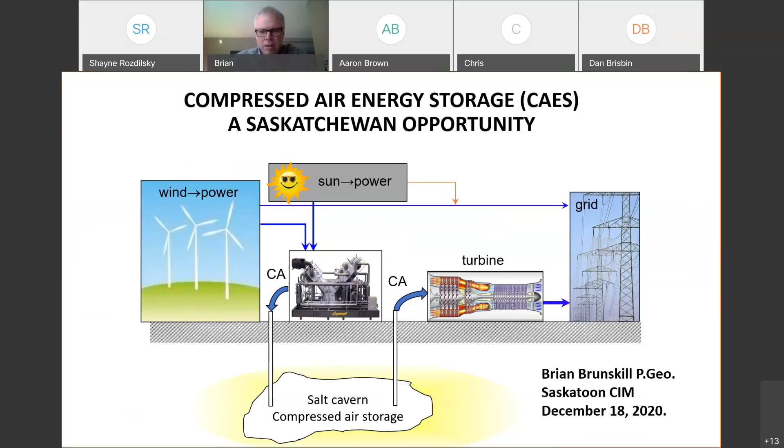So I'm going to provide a little bit of an outline here. I'm going to talk about SaskPower's planned inclusion of renewables into the grid, and the potential ways we can start to decarbonize the grid in a significant way by advancing renewables. And of course, the important part about that is converting renewables to firm capacity using energy storage.

I'm going to describe how compressed air energy storage works, and again, the opportunity we have in Saskatchewan to use this technology, because we have abundant experience developing salt caverns. I'm going to touch on another side benefit of this: actually storing heat in the deep subsurface.

My background, for quite a few years now, has been in geothermal energy, which is an attempt to extract heat. We can also use these aquifers for storing heat.

And that's going to lead us into a few comments on using the electricity from renewables to make hydrogen, which can then be used to make power in different forms, and how, if we learn about a storage pathway for compressed air storage, that will be complementary to the eventual development of hydrogen in Saskatchewan.

So SaskPower's stated intention is to have 50% of generation capacity come from renewables by 2030, and at that point eventually abandon all coal generation except for the Boundary Dam carbon capture and storage plant. This involves advancing wind and solar generation, supported by additional gas generation capacity - the new Chinook plant at Swift Current, a 350 megawatt plant that came online last November, I believe. They've also secured a 315 megawatt power purchase agreement with Manitoba Hydro.

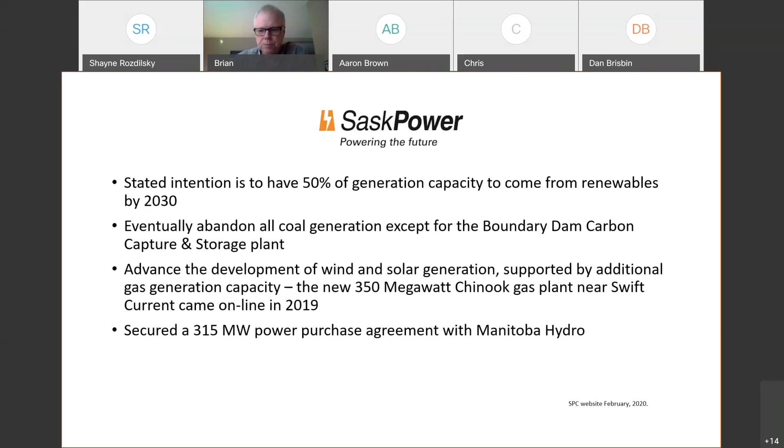So where can we actually develop, what are our opportunities for developing low and zero carbon energy in Saskatchewan? We look at the potential for more hydro, and of course there's very limited growth potential there, particularly in southern Saskatchewan. Pumped hydro, we have very limited potential there in Saskatchewan, again particularly in the south where the need is greatest.

We're investigating the potential development of SMRs. That technology is a few years away, and there are some issues in terms of load following, because we'll see how this unfolds, but they may have limited ramping ability, and we'll see why that's important in a little bit. And of course, there are a number of social license issues that will need to be resolved.

Potential for more geothermal for energy generation - I'm sure you're familiar with the Deep Earth Energy Project west of Estevan by the US border. It's early days for that technology. It's looking promising, we'll see where that goes, but it's still early days. There's a ways to go yet before that could become reliable.

And of course, we have carbon capture and storage technology that's been worked on in Estevan at the Boundary Dam project for many years. There may be some potential for expansion there. And of course, we have our renewable energy sources, which in Saskatchewan speaks predominantly of wind and solar.

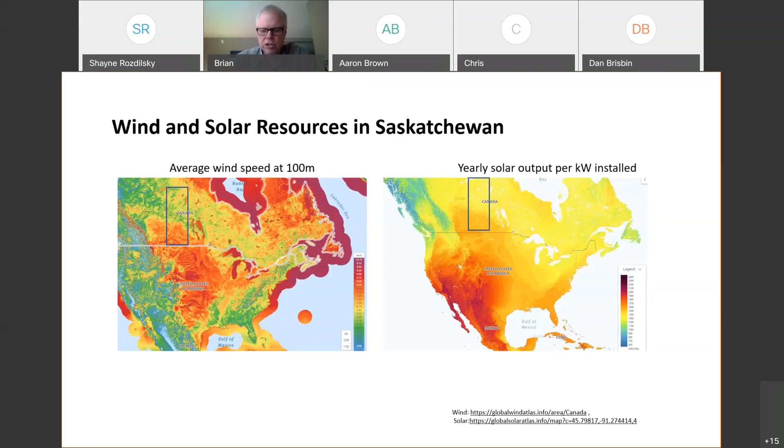Costs for solar, this is in the news lots of course, continue to drop significantly, along with wind. SaskPower is reporting that 60 megawatts of solar generation will be added by 2021. But this really speaks to the thousands of megawatts of additional potential for solar development in the province.

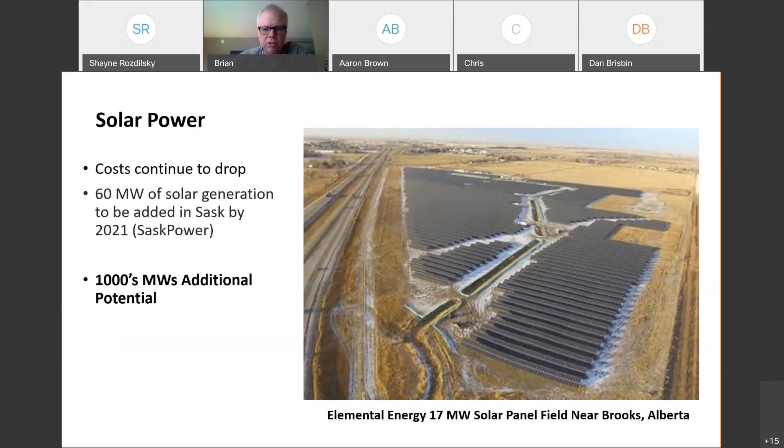I'll use the word renewables. We'll be speaking mostly about wind and solar, but it's really just a proxy for all potential renewables.

That really just speaks to the intermittent and spiky behavior of wind generation. The profile is somewhat predictable, but it's still very intermittent, and it's this intermittency that is the largest issue we have to deal with when considering developing or including renewables into the grid.

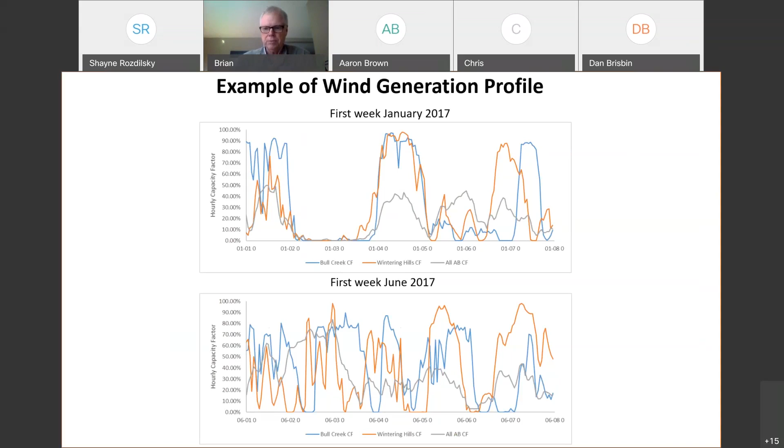So it's because of this intermittency that energy storage is required in order to smooth that electricity over fluctuating demand periods. To facilitate large-scale development of renewables, large-scale energy storage systems are required.

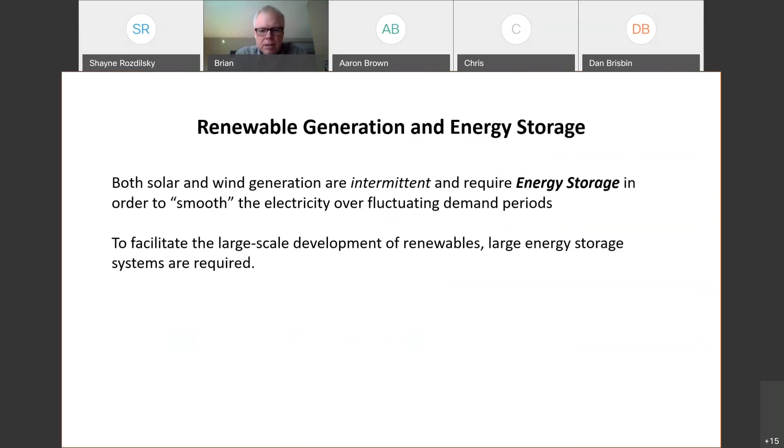We have this one project in Canada. The storage is very flexible, large scale, and long term. These are wonderful assets to have, but the location is very significant, and I can't imagine we really have any suitable locations in southern Saskatchewan particularly. There are a few sites being considered in the eastern slopes of the Rockies in Alberta and into BC, but nothing available really in Saskatchewan, at least in southern Saskatchewan.

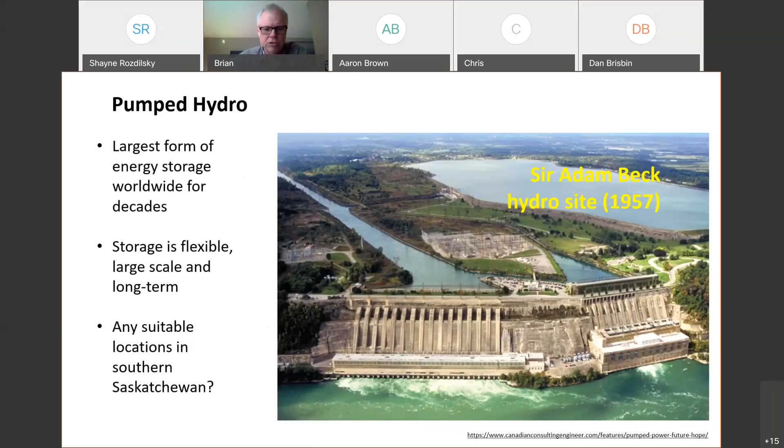Batteries can provide complementary short-term duration storage. They're wonderful, and they have a rapid ramp rate, able to be turned on and fired right up to capacity in a very short period of time. This is important to follow load.

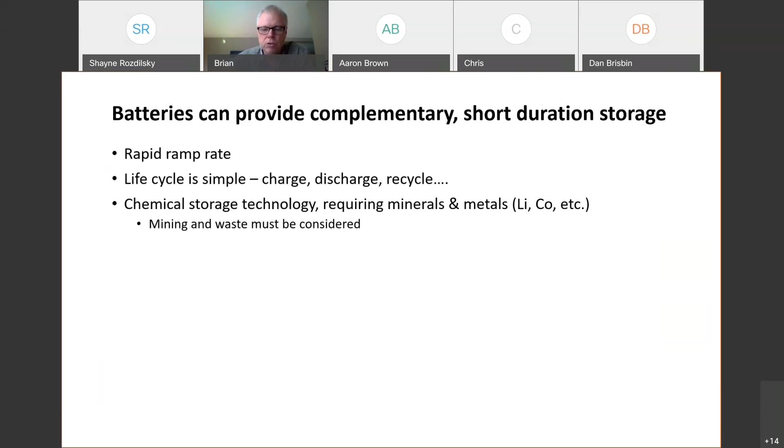The life cycle for these batteries is simple: charge, discharge, and recycle. It's a chemical storage technology requiring minerals and metals for mined products, and ancillary to that, the mining waste must be considered in the development.

Again, it's suitable for short-term storage, really measured in hours. Although technology costs per kilowatt hour are improving, market and geopolitical risk in acquiring raw materials are less predictable, and these are becoming much more newsworthy these days as we look at foreign markets for accessing this material. In terms of cost, eventually the cost of batteries will probably not be much more than the cost of raw materials as the technology improves with time.

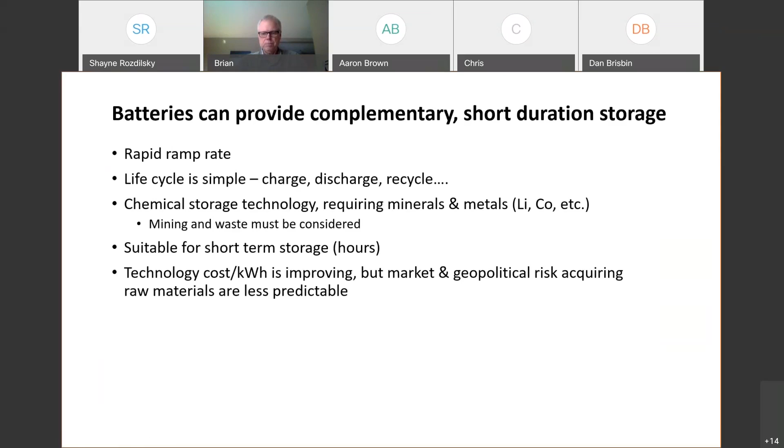So how does CAES work? How does compressed air energy storage work?

We have wind and solar generation. Both of these supplies can go directly to the grid, but any excess sun, solar, and wind generation can be used in an air compressor and pumped, using atmospheric air, into a salt cavern that's been built specifically for this compressed air storage. At a later part of the generation cycle, this air can be released in a controlled fashion and run through an on-site turbine to generate power that is then put into the grid. It's a very simple process. There are no chemicals involved and no toxic waste, we're just using atmospheric air.

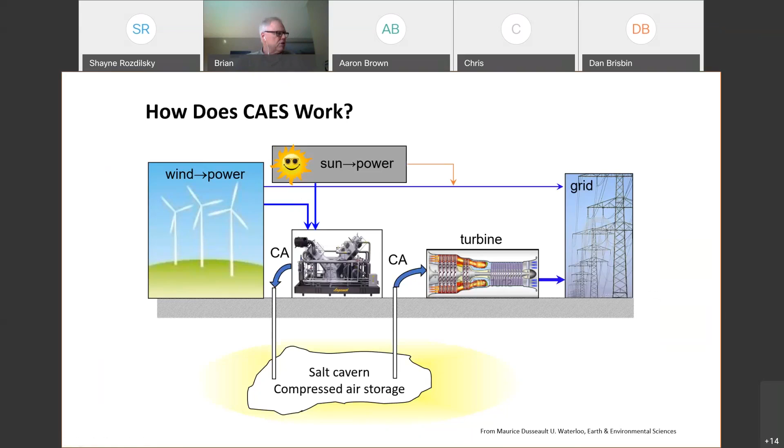It's a very simple process. This is not new. The plant picture on the left is from Huntorf, Germany. It's a CAES facility developed in 1978 and is under consideration for expansion now.

A 290 megawatt system. And in 1991, the plant on the right is from McIntosh, Alabama, a 110 megawatt system. So these plants have been operating over 70 years combined, with very reliable production and very little downtime. They've been very successful units.

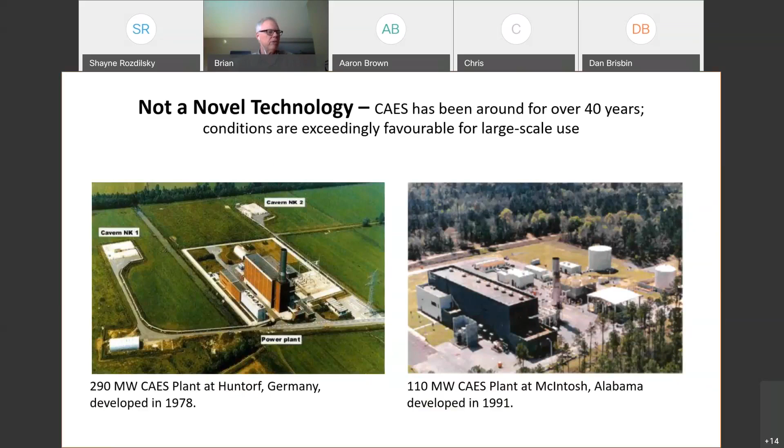Compressed air energy storage will help smooth the power provision from intermittent renewables, converting renewables to what's called firm capacity, providing flexible, large-scale, long-duration storage that can eventually emulate base load. It's this firm capacity that is comparable to what a natural gas fired facility might produce.

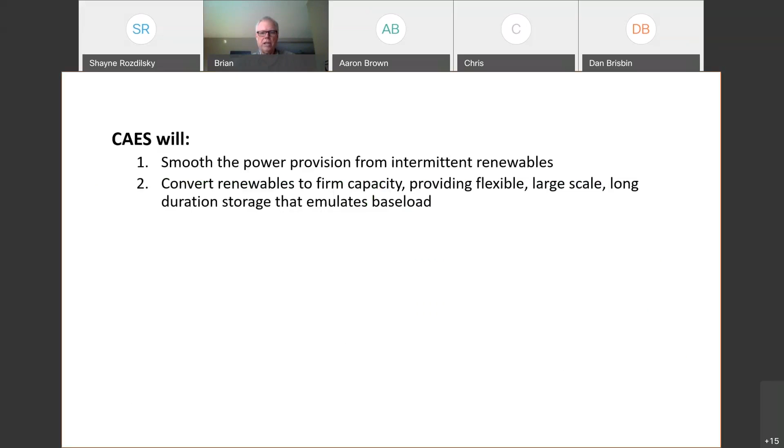So in this graph, this is a 24-hour period in the day where I'm trying to show what baseline would look like. Baseline power is the minimal power produced all the time, the minimal amount of electricity produced on a 24-hour basis. This base load line is provided predominantly in Saskatchewan by coal electricity generation, supplemented with natural gas and some hydro. Renewables fit in there as well, but their role is very tiny in that capacity right now. I think predominantly of coal.

Coal plants are not very flexible in terms of their ability to ramp up or down, so they do a lot of the heavy lifting with base load. The grid demand, the brown dashed line, represents what the actual load demand is, and you can see it changes throughout the day. That's a fairly gentle curve, but actual grid demand is variable from hour to hour and minute to minute, and it's SaskPower's job to follow that, to do load following, meeting it by ramping our hydro and gas generation assets up and down to try to fit right within that dashed line.

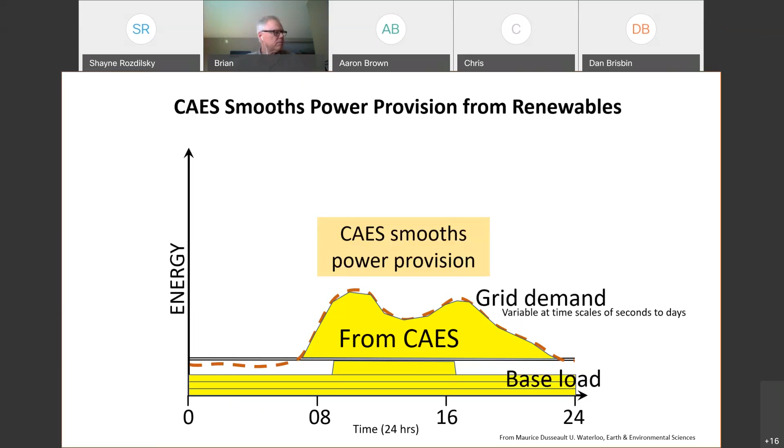So I'm going to talk a little bit about geology now.

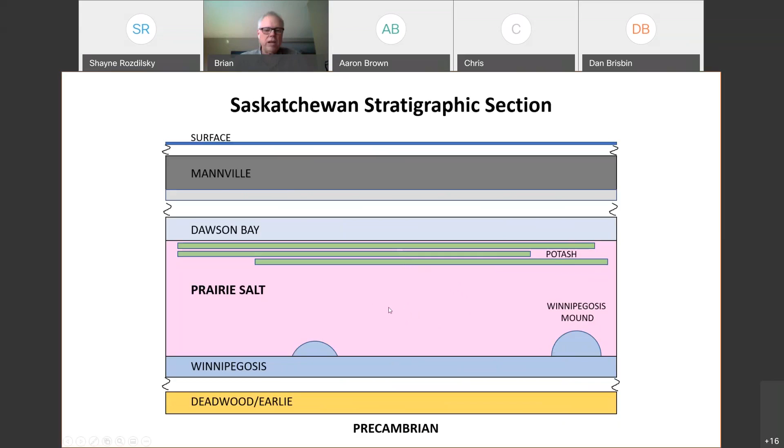I'm going to try to illustrate very simply how caverns are developed. This is a very stylized stratigraphic cross-section right across the province, where the large pink section represents our prairie salt. In a very large part of the basin, we also have stringers of potash at the top, and depending where we are, more around Saskatoon and in the southeast, there's the presence of Winnipegosis mounds. Within this large salt section, there are also often stringers of anhydrites and insolubles, things we would try to avoid when developing a cavern.

Following a 3D exploration program to find the ideal conditions for cavern development, the process would be to drill a first well and core the salt to assess its mechanical stability features, its dissolvability, mining properties, and its stability for mechanical cavern development.

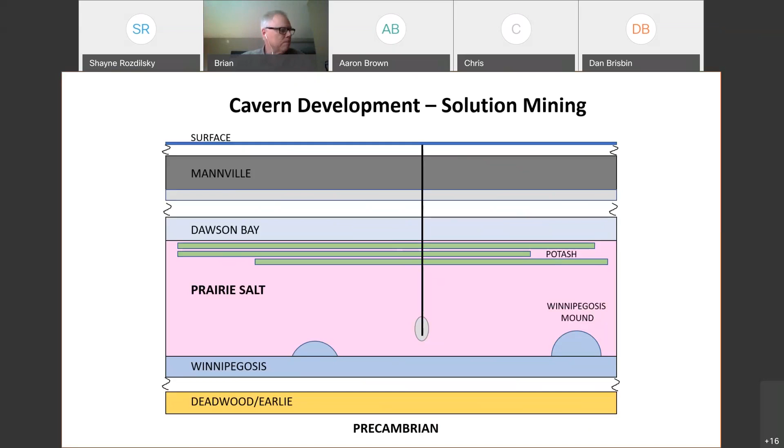Once that's been satisfied, it's a matter of a solution mining process, as many are familiar with - using fresh water to wash the cavern space. That's enlarged using specific mining methods we've learned over the years since the mid-1950s, how to control the size and shape of the cavern that's developed.

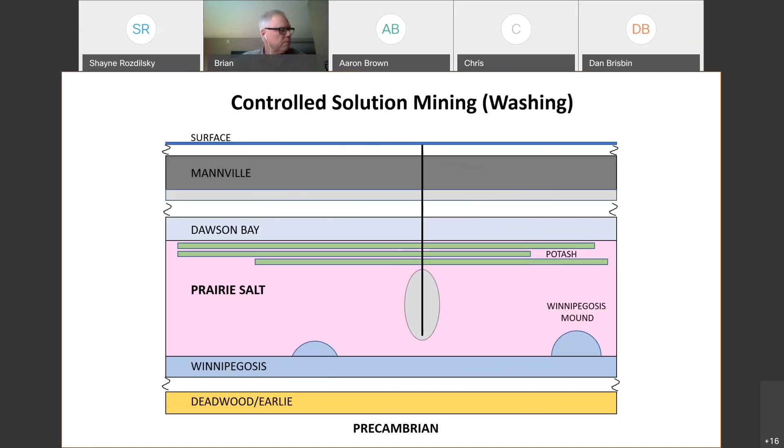Of course, in itself we can create these caverns, but another feature that's also necessary is an aquifer where we have to be able to dispose of that brine. For every unit of salt that's dissolved, I think there's been 3 to 5 units of brine created. This is very salty water, so it has to be dealt with appropriately - it can't be left on surface.

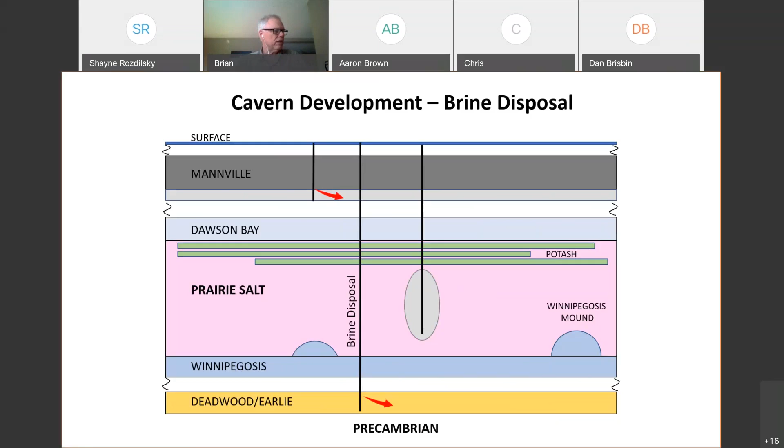So in the Belle Plaine area up through Saskatoon, the Deadwood Aquifer is used as a disposal location. And in the west central part of the province around Lloydminster, the Lower Mannville is used as a receiving aquifer for that salt. Once this infrastructure is in place, additional caverns can be created.

We have excellent geological and cavern operating conditions for CAES in Saskatchewan. The optimal depth for a CAES facility is between about 800 and 1,200 meters. They can be developed deeper than that - there are caverns at Regina as well, which are quite a bit deeper.

But the efficiencies change because with greater depth there's greater temperature, and salt is more plastic at greater temperature. There's potential for flow within the salt, so the pressure has to be maintained at a higher level as we get further south and into deeper salt. So it changes the pressure profile that's available for the air being compressed and extracted.

We have the disposal aquifers available for brine. There's been lots of work in Southern Ontario and New York State for developing CAES facilities. They have suitable salt, but there are issues around no suitable deep aquifers to dispose of the brine.

The operating range is from 6 to 20 MPa. And in Saskatchewan, we have abundant experience with cavern development, of course - I think the first cavern at Melville was in about 1958.

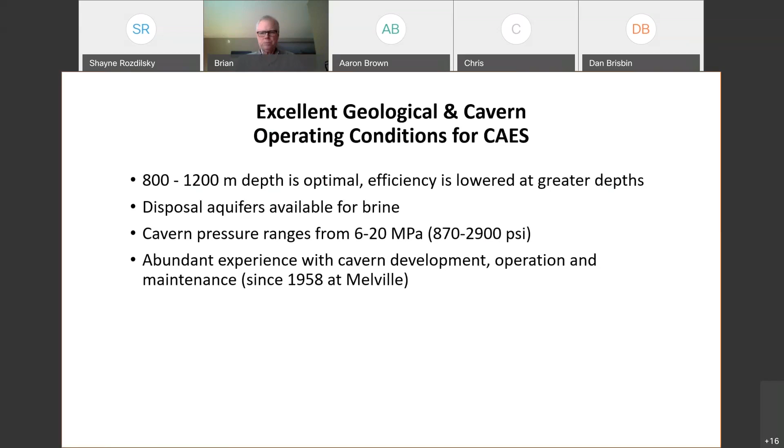This is a map of the prairie salt distribution throughout the province. It covers a very wide swath of the province.

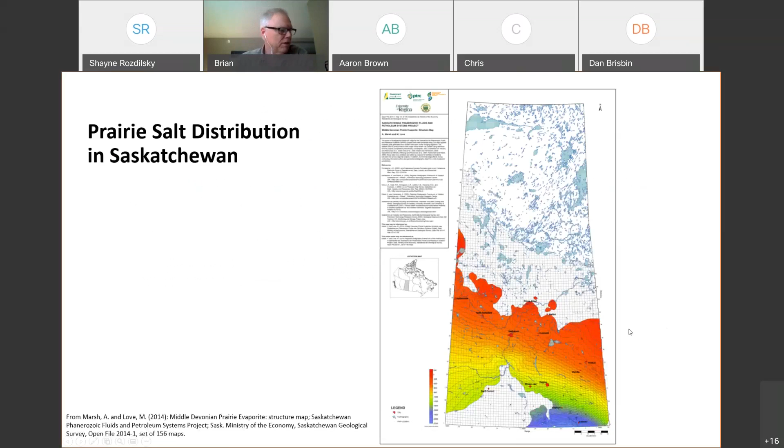This is a profile across a section with Saskatoon in the center. What I'm trying to show is the 800 to 1,200 meter range - again, these are just the ideal depths for CAES development. The contour level shows the optimal depth locations, and you see there's a very broad corridor right from Yorkton through Saskatoon, North Battleford, and Lloydminster in terms of depth.

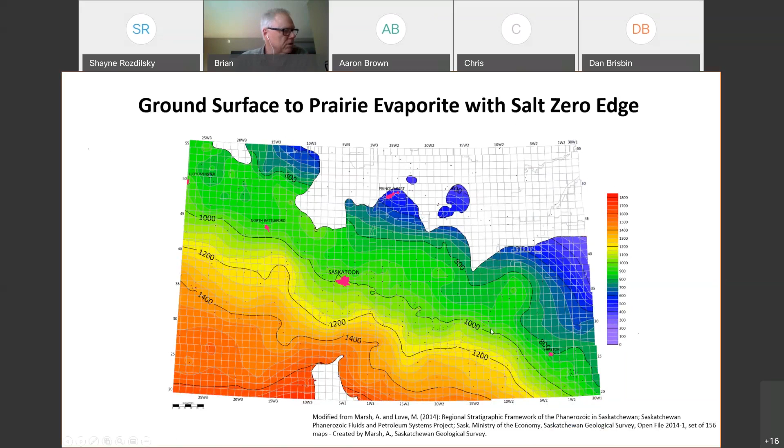Of course, we want to develop caverns as large as possible, depending on what the load will be. So this is an isopach of the total thickness of the salt, and you can see from the warmer colors, thicknesses up to 200 meters thick. So that's quite a bit of salt that we can actually work with.

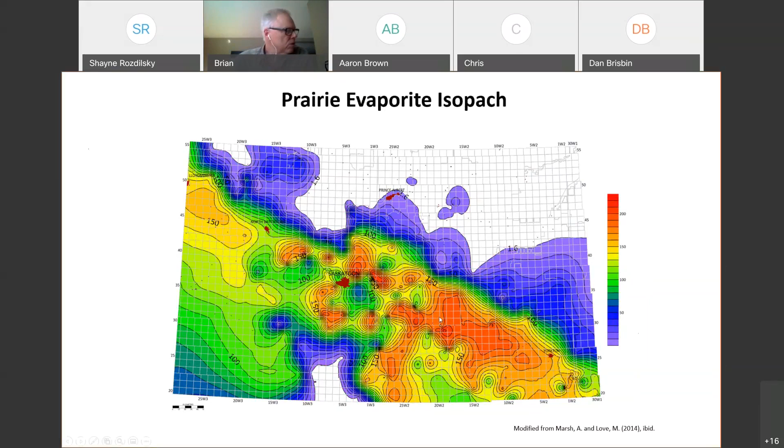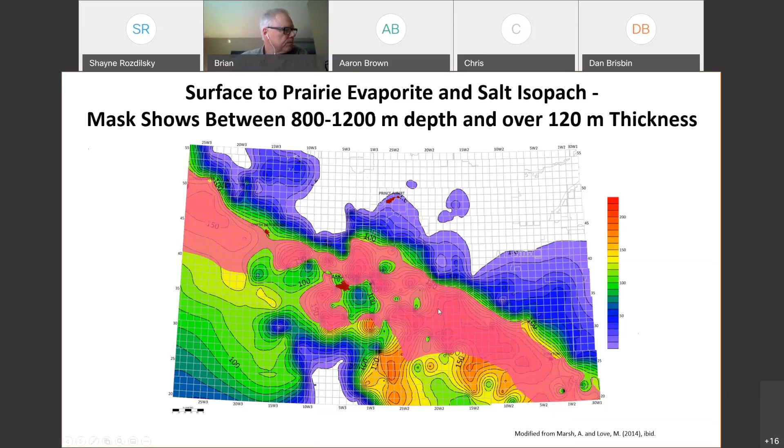So I'm going to get into a little more detail about really two compressed air energy storage systems. The diabatic system - diabatic means the heat generated from compression, when the compressors are operating on the renewable electricity source, there's an enormous amount of heat created, and that heat is just released to the atmosphere. But we have the result of the compressed air now in the cavern.

Later in the power production cycle, when that atmospheric air is released, when it goes into the turbine, a modest amount of natural gas is included with that air, and that's combusted with the compressed air to provide some immediate heat for expansion. That expansion is what's going to provide a lot of power to that turbine before the electricity goes into the grid. So there is a relatively small natural gas input at this point.

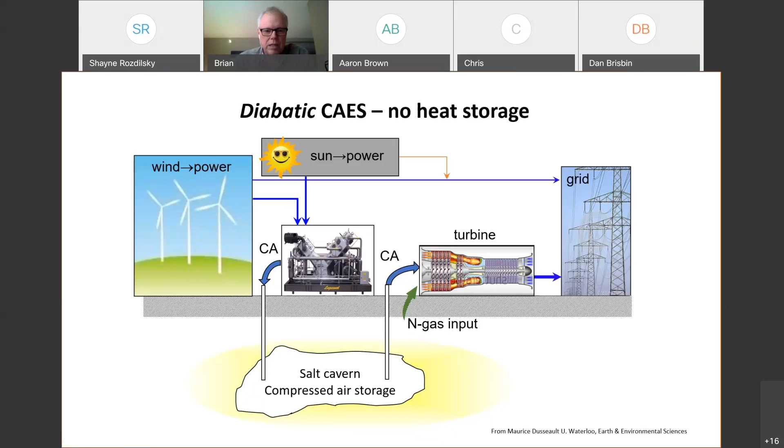There's another opportunity here for Saskatchewan, and that is the adiabatic system. Adiabatic just refers to the heat actually being stored and reused. So instead of that air's heat being lost during compression, it is actually stored by a recuperator of some kind. That could be on-surface storage as well, with large recuperators. And so what happens now is when the air is released for generation, that heat is then added at that point.

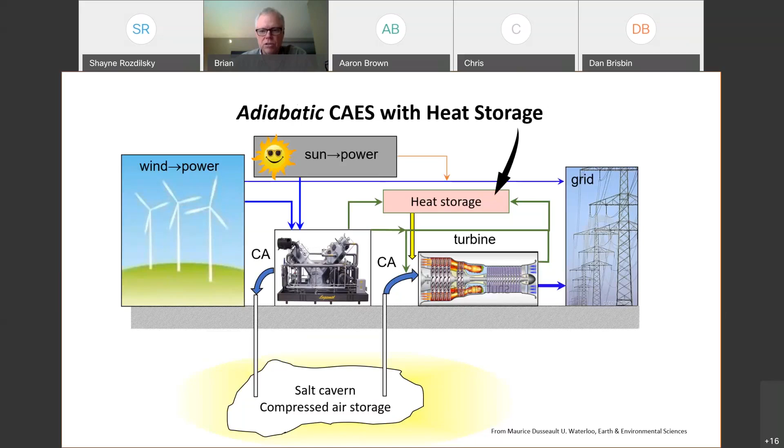And so this system no longer uses any natural gas. This system is 100% carbon free. There is no combustion involved with this system at all. The operating costs are higher, but the basic CAES system has the capacity to operate with zero greenhouse gas emissions. So in this case, we've used renewable sources, converting intermittent renewable sources into firm capacity with zero greenhouse gas emissions.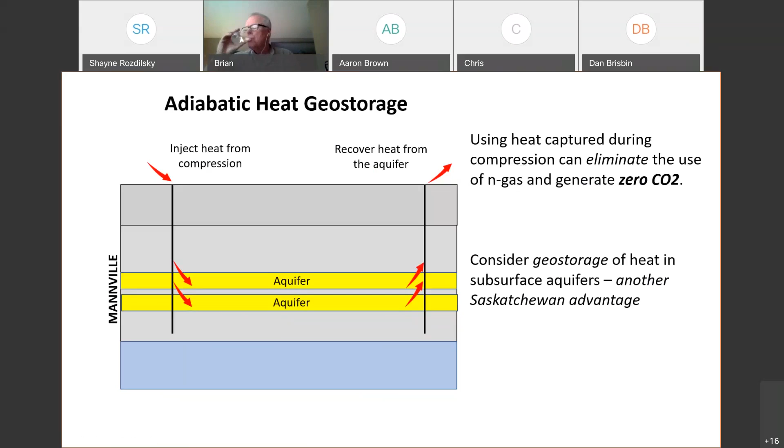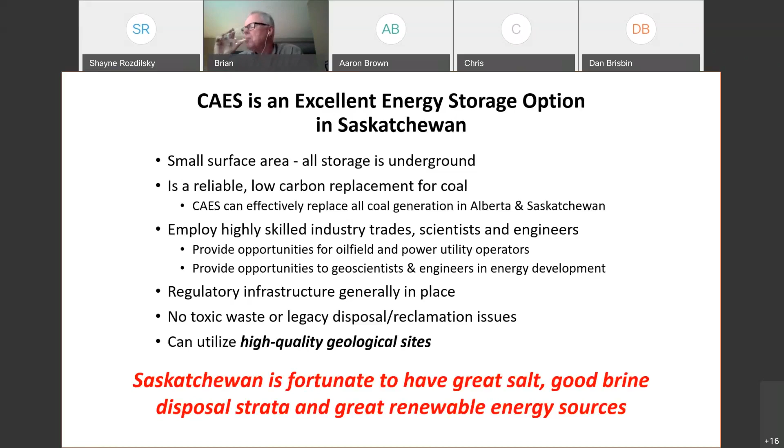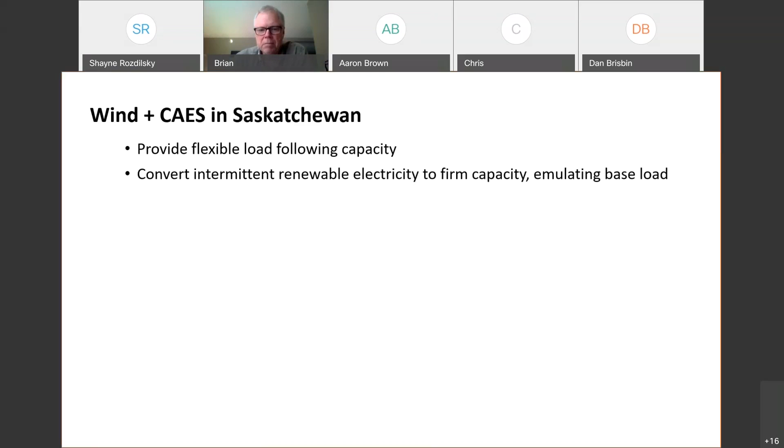Wind is our greatest renewable asset right now. So if we're more specific to wind generation, because it's available all year round in a large way, wind plus CAES in Saskatchewan provides that flexible load-following capacity we've seen. It converts intermittent renewables to firm capacity, eventually even emulating base load. With suitable storage, CAES will facilitate large-scale renewable generation development, potentially replacing the construction of more natural gas plants.

And a new diabatic system - that's the one where heat is not captured - right now is cost equivalent to in-class combined cycle gas turbine generation, like at the Chinook plant at Swift Current, with an 80% reduction in greenhouse gases. This was provided to me by an energy developer in Calgary called RMP Energy Storage, who are interested and are in the early stages of designing a system to actually build in Saskatchewan. So again, this is cost equivalent with an 80% reduction in greenhouse gas emissions.

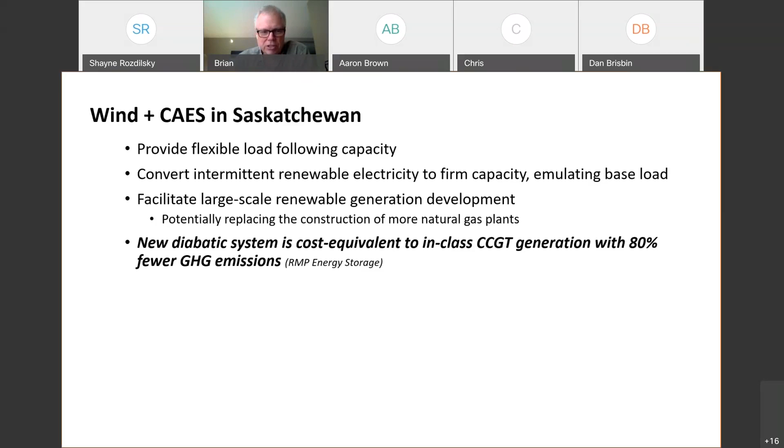And of course, having a CAES facility where we have these large caverns, we can actually start to integrate large-scale hydrogen storage, as well as hydrogen being added as an additional fuel, a supplementary fuel with natural gas.

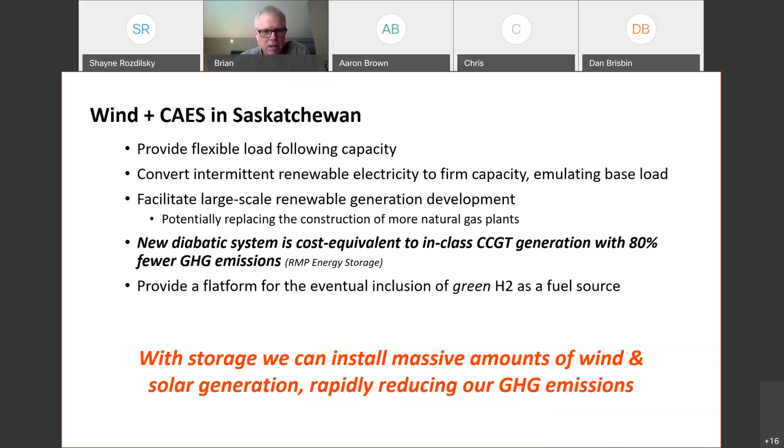Just going to touch on hydrogen for a moment, where we use electricity to create hydrogen, to then create power in its various forms through fuel cells. We can use renewables to make green hydrogen using advanced electrolysis. And natural gas, we will be diverting natural gas through this kind of a stream because we're trying to avoid the combustion of CO2, but we can actually reform natural gas to create what's called blue hydrogen, which still produces carbon dioxide.

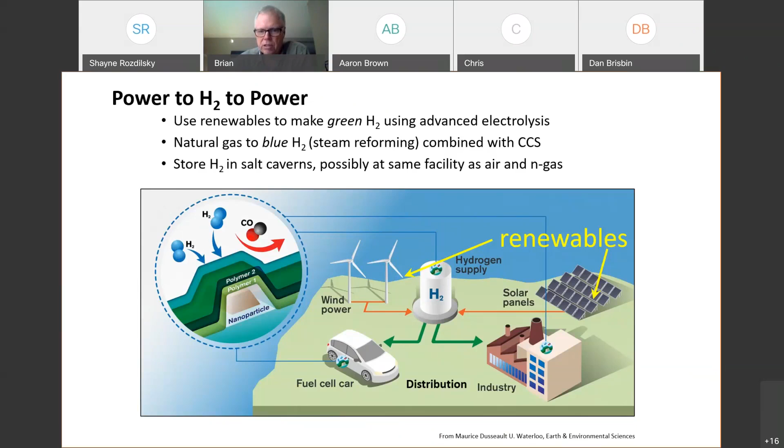But when combined with carbon capture and storage, there is an opportunity to use our natural gas converting to hydrogen and then capture and dispose of the CO2 emissions. We have the potential for storing hydrogen in salt caverns, possibly at the same facility as air and natural gas. Using salt caverns for hydrogen storage is suitable as well. The mechanical properties of salt are stable, and salt in itself is inert with respect to hydrogen.

It can be a problem, but salt is also, because of its plastic properties, self-sealing in terms of leakage in some cases. Salt has very low permeability compared to other geological media, and caverns can provide very large volumes for storage. Most hydrogen is stored on Earth in metal containers, and there's a real issue with steel with hydrogen, as it causes embrittlement in metal. There are currently 4 hydrogen storage facilities in the world, 3 on the Gulf Coast in Texas and 1 in northeast England, so they're not widespread. A lot of conditions have to align before we can even make caverns for anything.

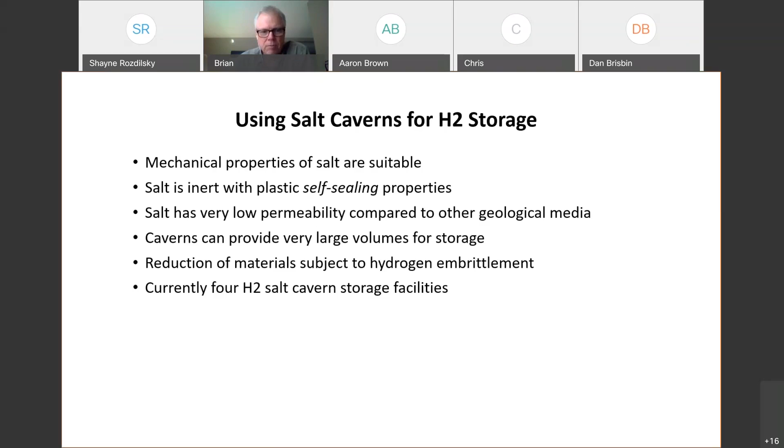So this is a kind of a stylized idea I have for an industrial complex to use our CAES to create a CAES asset that can then be expanded once that surface infrastructure is in place. The size can be increased incrementally. As opposed to battery storage, where increasing capacity is more of a linear cost since you just have to add more batteries, in a CAES project you have the opportunity of economies of scale, and you can use a lot of the existing surface infrastructure. We could have natural gas on site, and we could have hydrogen on site. So you can see there's the potential to combine a lot of different industries within this, with CAES providing the fundamental groundwork.

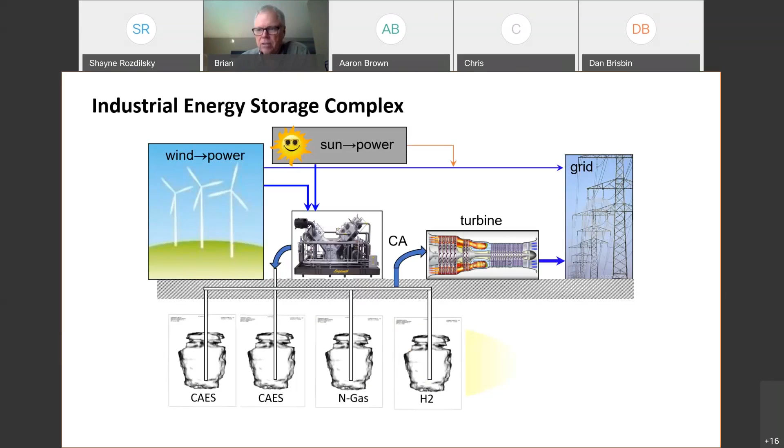Some summary points that are important to consider. For me, it's the timing. Renewables are available now, and CAES technology is available now. We have lots of operating experience, and people know how to build and run these things. We can build CAES facilities instead of more gas turbine facilities, thereby rapidly increasing generation from renewables rather than hydrocarbons. Wind plus CAES is cost effective, equivalent to gas turbine generation now with 80% fewer emissions.

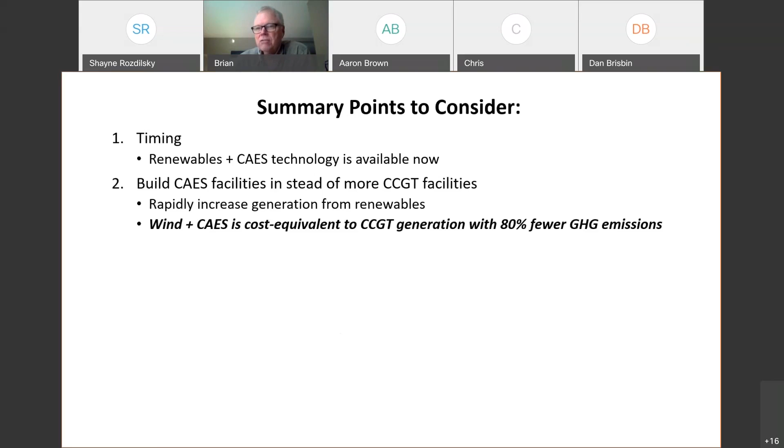So for me, there's the benefit of reduced emissions, but this is just good business. An adiabatic CAES system has zero greenhouse gas emissions. It costs a little more, but there's the potential for that as well. When I refer to wind plus CAES being cost equivalent to combined cycle gas turbine generation, that does not consider the added cost of any kind of carbon tariff or tax. This is before any kind of a tariff.

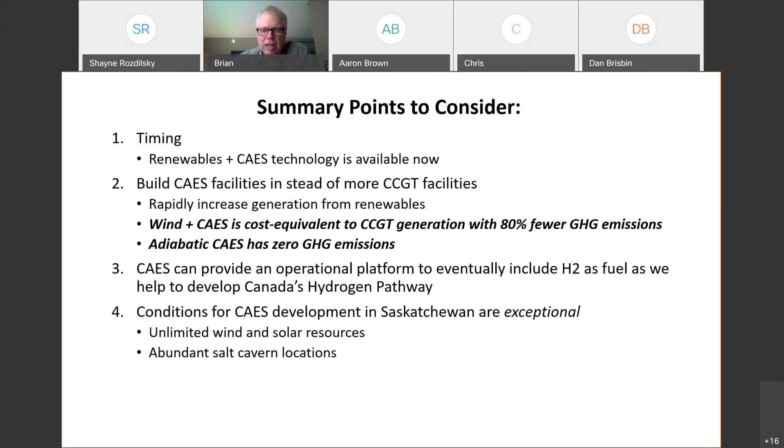And of course, CAES can provide an operational platform to include hydrogen as fuel, as we all want to help develop Canada's hydrogen pathway, though it's still a ways out there. The conditions for CAES in Saskatchewan are exceptional—so many things line up. We have unlimited wind and solar resources, abundant salt cavern potential locations, excellent brine disposal potential, excellent capacity for heat geostorage in the case of an adiabatic system, and a highly trained and qualified workforce.

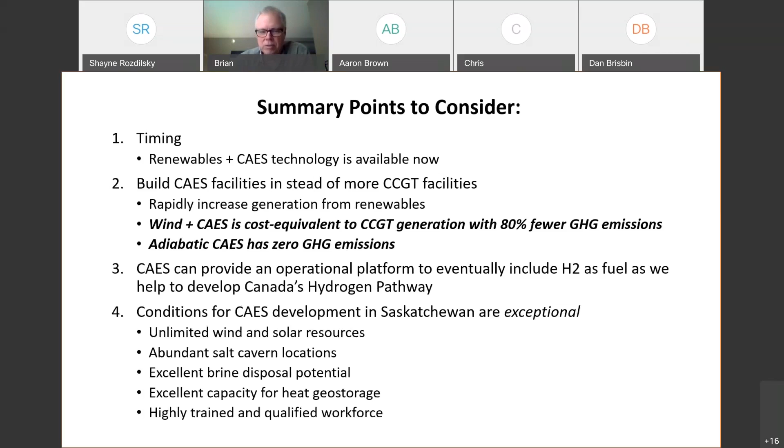So with that, I'm happy to open up a discussion and answer some questions as best as I can. Thanks.

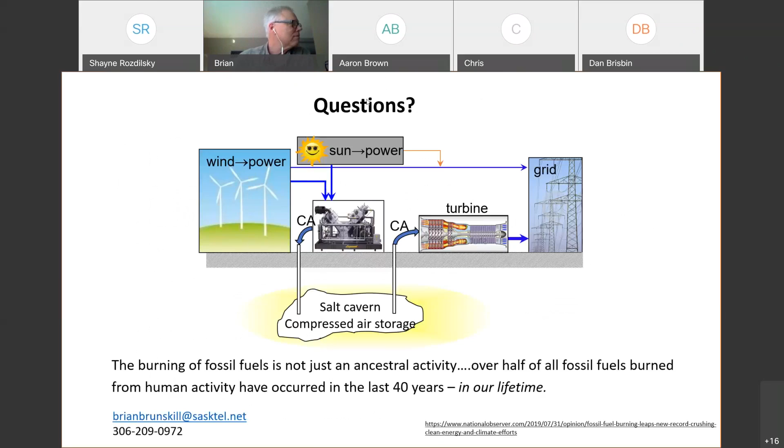Well, thank you, Brian, that's been a very, very interesting talk. I don't think a lot of us knew some of the potential for these alternative energy methods, especially when it comes to storing it. You think so much of just batteries, but to have a natural almost storage ability to store this green energy—I think that's really got some really good potential for this whole province.